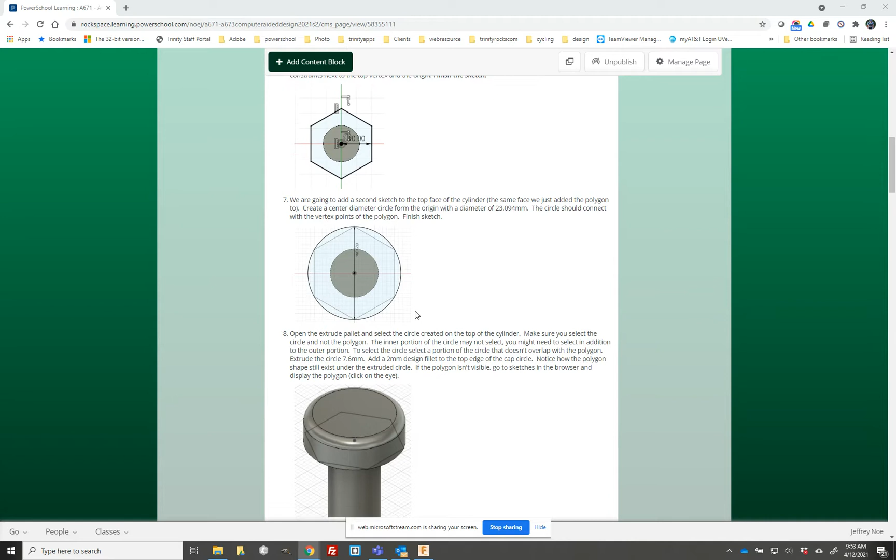So then we're going to come back, we're going to create a circle on top, sketch out a circle on top of the cylinder again, and we'll extrude it up so that we end up with both the polygon shape extruded and the circular shape extruded. The circle shape has the fillet on the edge, okay, to create that rounded corner. And we're going to come back to finish the cap. We'll have two bodies. The first body is going to be the rounded cap and shaft. The second body will be the polygon extruded.

We're going to split the rounded cap from the shaft, okay? And then we'll come back, we'll have two bodies. When we split the shaft and the rounded top, that'll give us a total of three bodies in our design. We're going to come back and combine the two bodies that make up the cap, those two bodies being the circle with the fillet edge and the polygon shape extruded. And we're going to use the intersect function. So only the material that is in both objects will be retained. Anything that is only part of one body or the other will be eliminated.

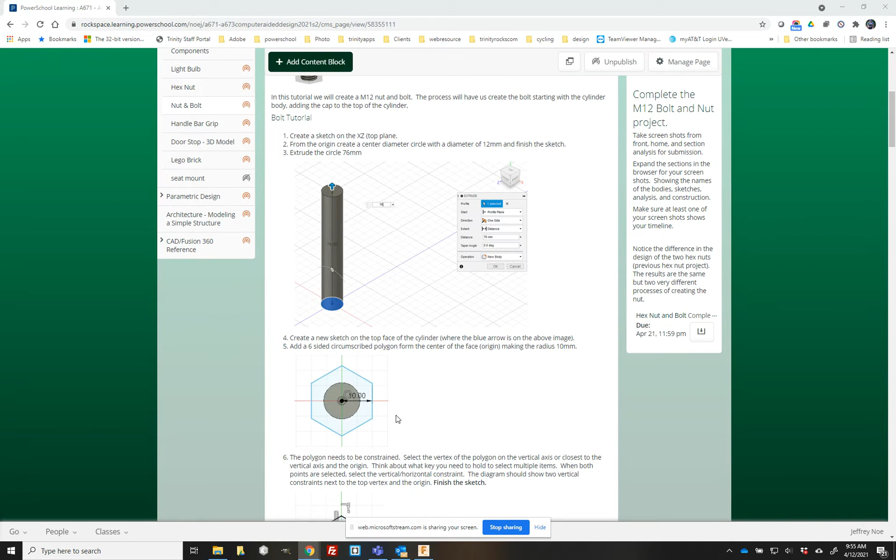Okay, and that will end up giving us our nice bolt cap with the chamfered edges like we had on our nut project. Last step is we'll come in and add the threads. Now, some of you will realize, why don't we make the circular top and the polygon portion of the top separate bodies when we create them? Well, if we did that, then we wouldn't get to go through the process of splitting, which is part of this project. We want to learn how to split bodies. If you don't have the split body function in your timeline, when I go to grade your project, there will be points deducted. So follow the instructions.

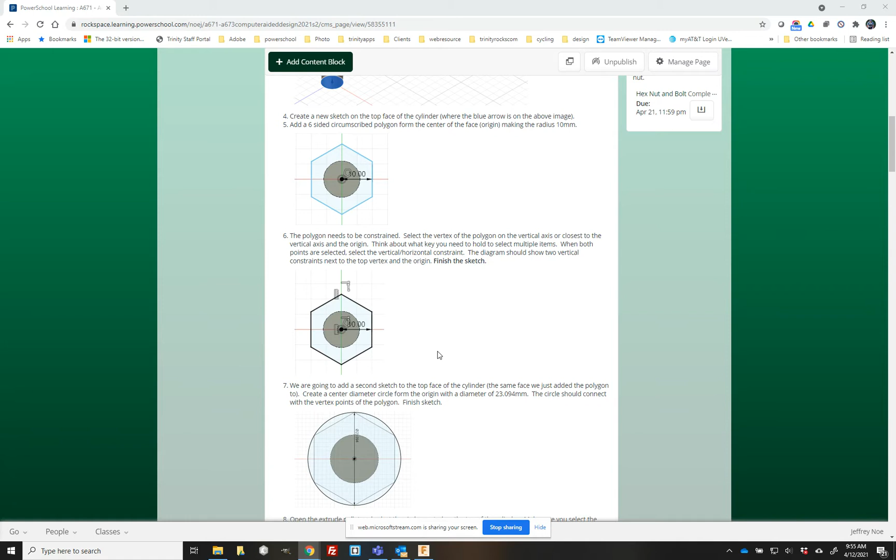All right, let's get started. I'm going to move this back to the other screen. And there's my example of the bolt that I've already done. I'm going to open a fresh canvas. All right, and we are going to sketch out the basis for the cylinder, which is going to be a 12 millimeter circle on the top bottom plane, and then we'll extrude it 76 millimeters.

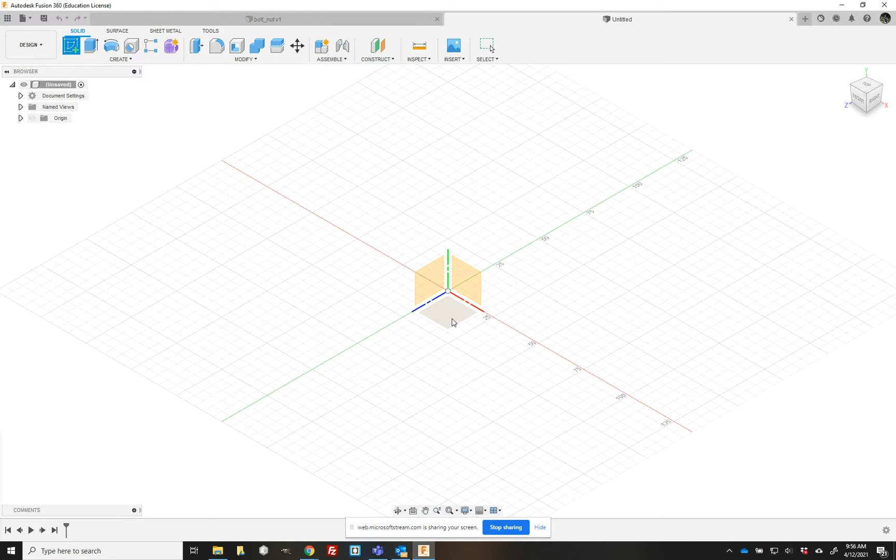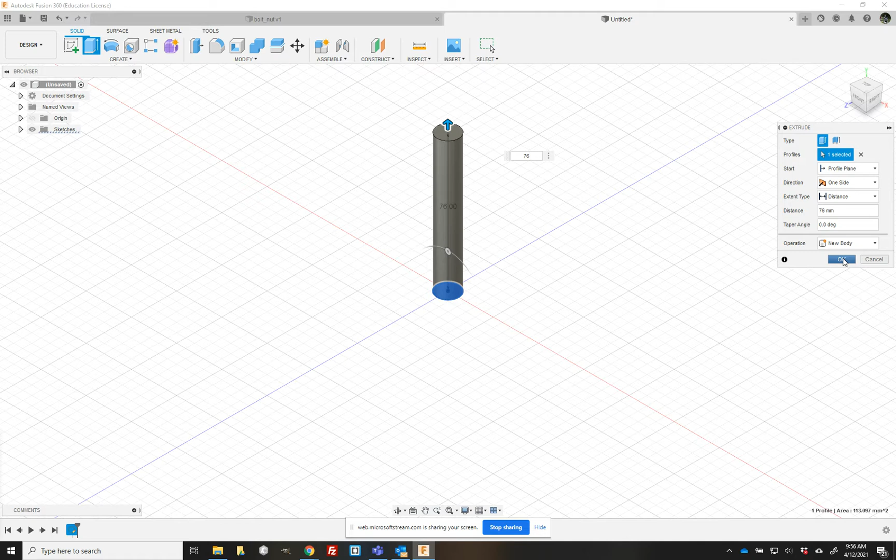So let's go create sketch. Top bottom plane, center diameter circle. Come to the origin, 12 millimeters, center, hit the E key, finish our sketch and extrude. And let's extrude it 76 millimeters. And there's our cylinder that will make up the profile of our bolt. I'm sorry. Click OK. There we are.

Now we're going to put the polygon on the top face of the cylinder. We're going to sketch out our polygon. It's going to be a circumscribed polygon, and the radius will be 10 millimeters. Then we are going to take that polygon. I'm going to draw it out on the x-axis, but we are going to add a constraint to it to ensure that it is horizontal vertical.

So turn off the dinging on my phone. It's Monday night, so the Monday night bicycle ride group is texting me that they're in.

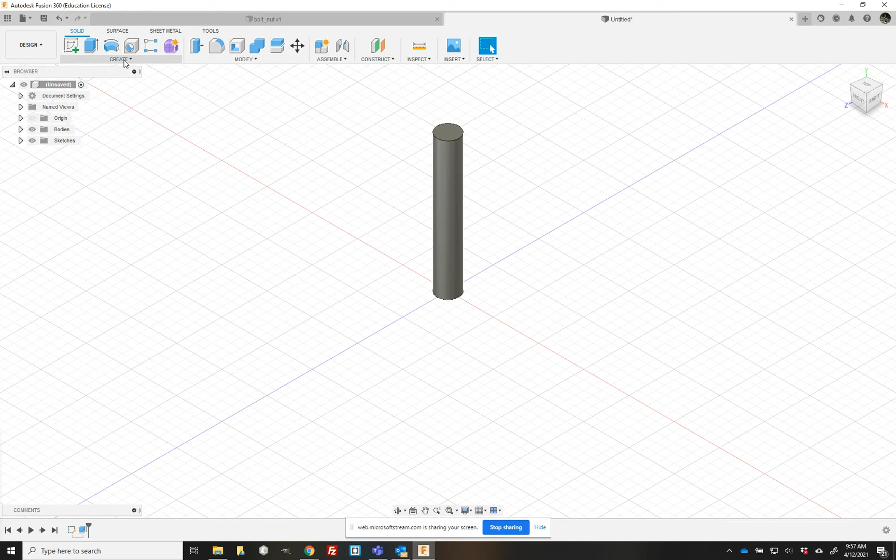All right, so create sketch. Why I went to the menu, I'm not sure. I never do that. Top face of the cylinder. There we go. Let's create a polygon, circumscribed. Start it from the origin, drag it out, as I said, along the x-axis, 10 millimeters. Type it in, click.

Now, we want to constrain this so it's horizontal vertical. So I'm going to click on this vertex. I'm going to hold the Shift key down, click on the origin. All right, they're both selected blue. I'm going to come up here, horizontal vertical constraint, click. All right, so I've got my constraints in place and added those.

All right, we have our constraints in place. We're going to finish sketch. So I've got this on top. Now I'm going to sketch out my circle on the top face of the cylinder. So let's go create sketch. Select the top face.

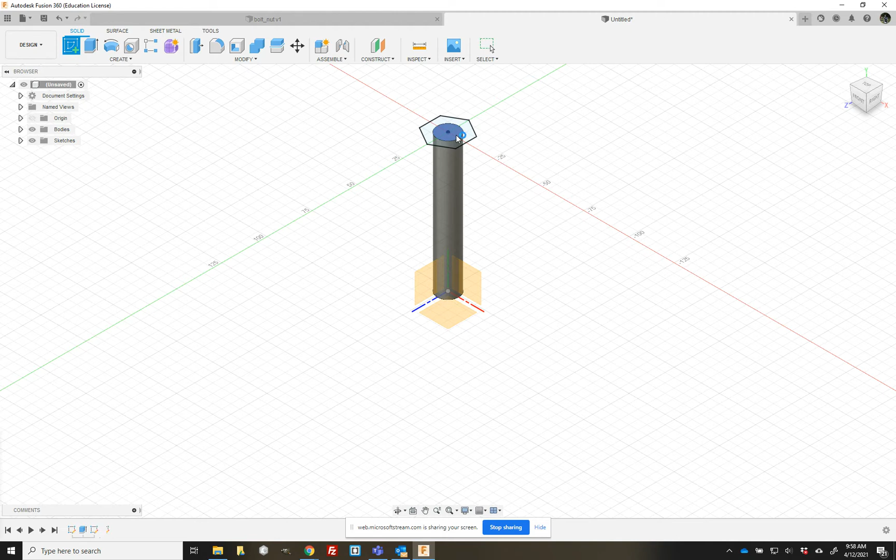And my circle is going to be 23.094 millimeters, which should snap it to the vertexes. Vortex, vertex. It's vertex. Okay. Snap it to the vertex here.

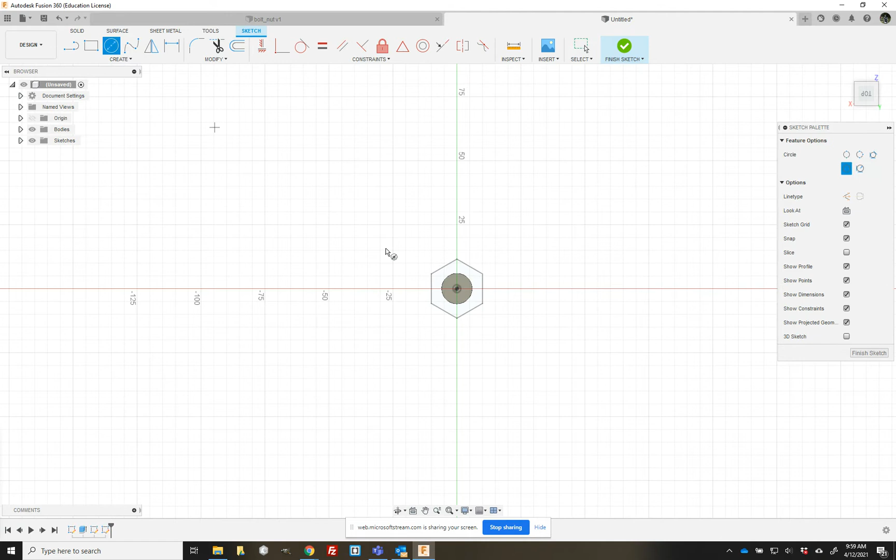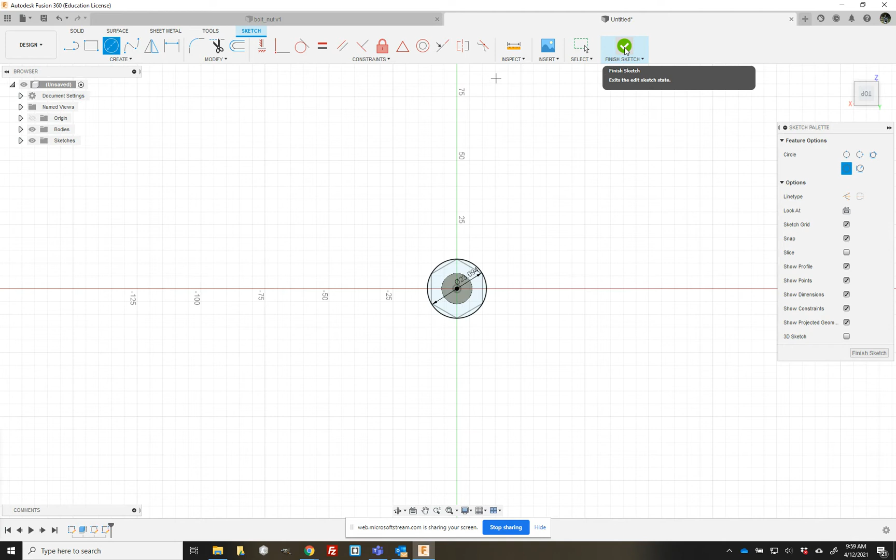So create center diameter circle. Drag it out. 23.094. Yes, that is the correct number. Enter. There's my circle. It does connect on the vertexes. Yes. And we will finish sketch, or hit E to finish the sketch and extrude.

So there we are. Now, we want to select the circle. If I select here, I'm going to select the polygon. There's going to be the small face. So I'm going to select the circle there. It looks like the top of the cylinder is selected. Let's go 7.6 millimeters. Yes, it did get the top.

Sometimes it leaves a hole in there. I've seen it do that before. And everything looks good. Join, click OK.

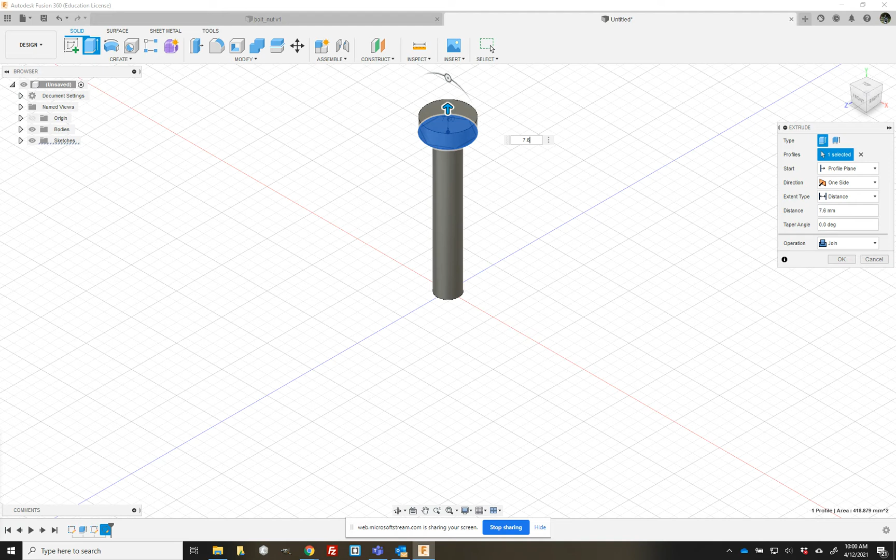All right, now we're going to fillet the edge of this circle by 2 millimeters. So I'm going to select the top edge. Oops, let me start that over. I'm going to select the fillet tool, modify fillet, or right here, fillet. I'm going to select the top edge, 2 millimeters,

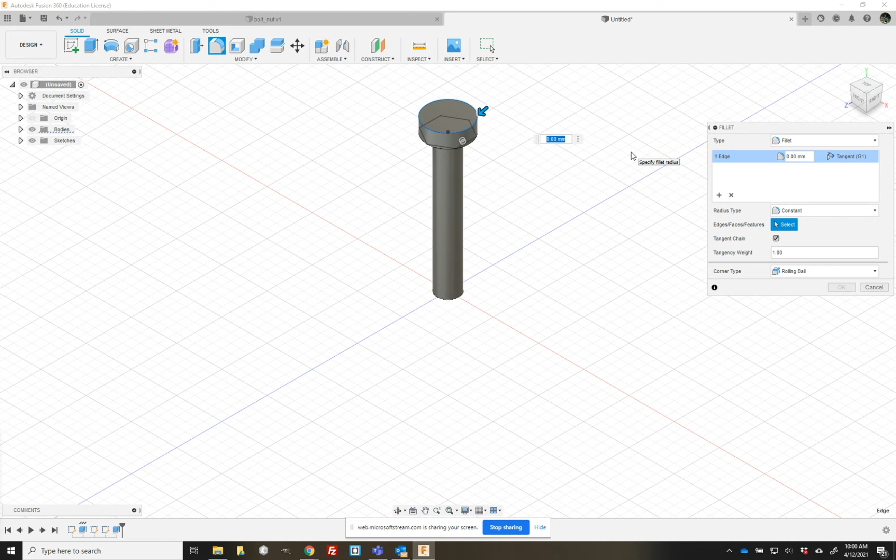and click OK. I don't have you all in class reminding me that I'm going too quick and not explaining where I'm clicking. Caught myself. All right, so we've got the cap there with a filleted edge, makes it nice and smooth.

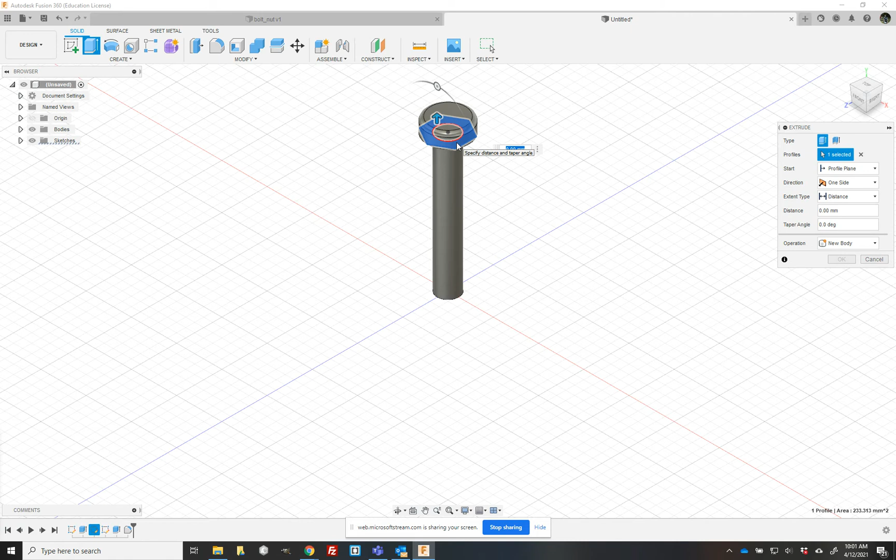So the next thing we're going to do is extrude the polygon up 7.6 millimeters. So extrude, there's my extrude icon. You can go create extrude, select my profile. So I'm going to select the polygon. Now in this particular case, notice that the middle is not selected. I want the middle selected.

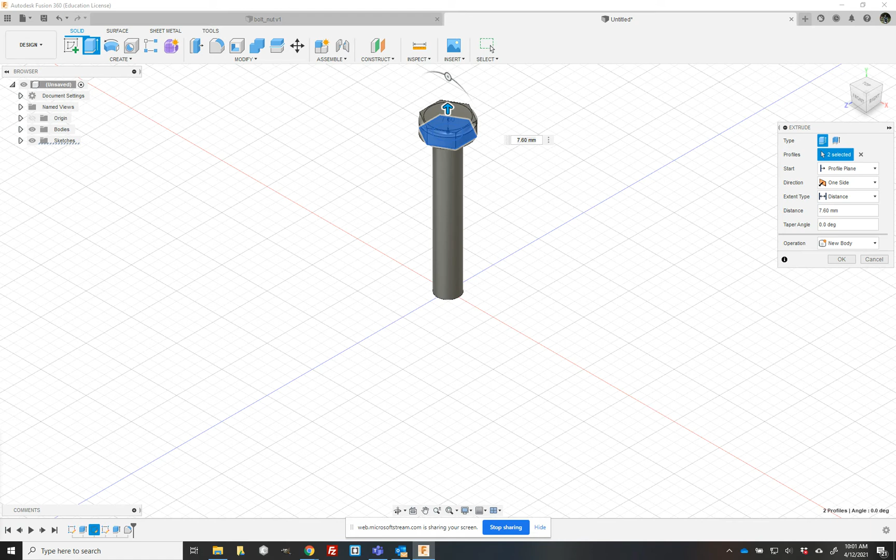Select. There we go. And it's going to be a new body. Okay. And 7.6 millimeters. I got that in. New body. Click OK. All right. Let's go expand bodies. I now have body 2.

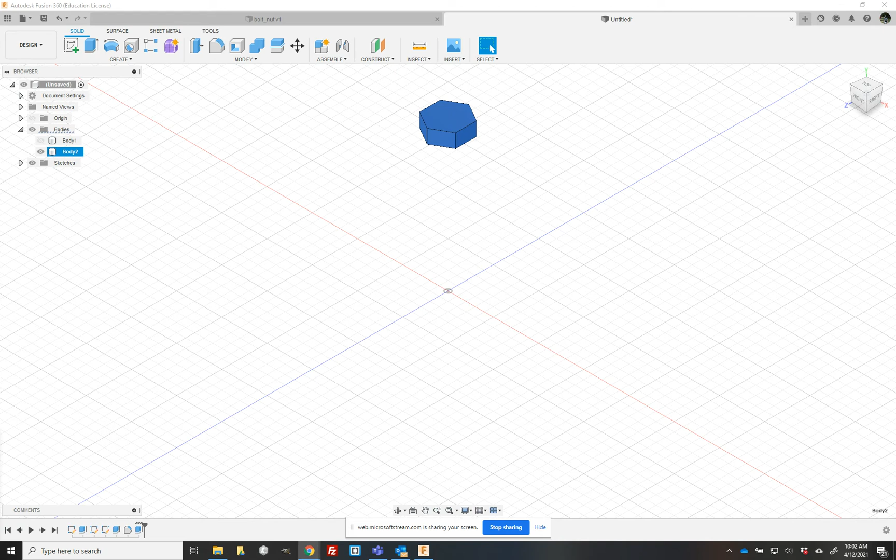Let's hide body 2, so I can just see body 1. Body 1 is the shaft and circular cap. I'm going to hide body 1 and I'm going to show body 2. But I hid that. Oh, well, I had body 1 selected. Body 2 is just the polygon shape of the cap. All right. So what are we doing here? Let's show them both again.

Now, the ultimate step is we're going to take the cap portion, hide body 2, select body 1. I need to split the cap portion of body 1 from the shaft and create a new body. We'll end up with 3 bodies, okay? The shaft will be body 3. This circular portion of the cap will be body 1. Body 2 will be the polygon shape. All right.

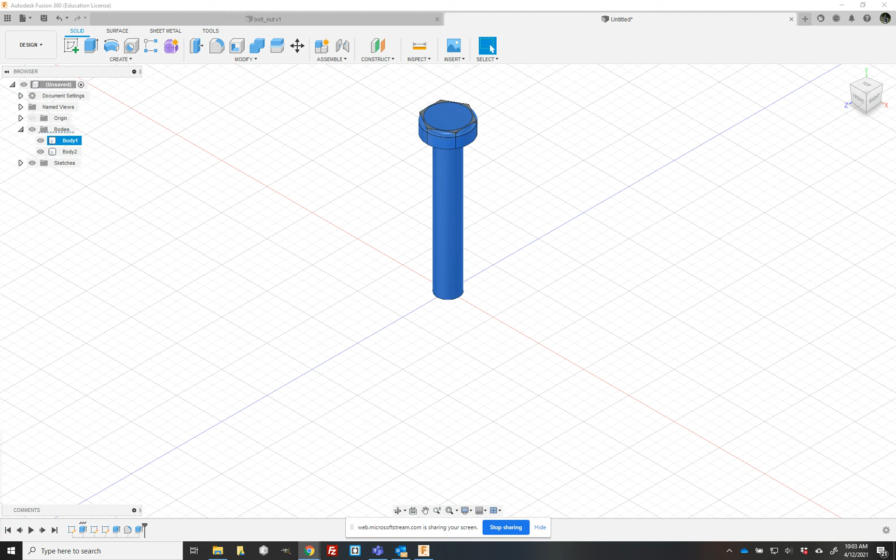Now, how do we do that? We're going to split bodies. What we're going to do is ultimately come back when we have the shaft separated away from body 1 as body 3. We're going to combine the circular cap and the polygon portion of the cap in an intersect function where only the materials that are in both bodies remain. Those that are only in one body or the other are eliminated. And that will give us our cap shape that we're looking for.

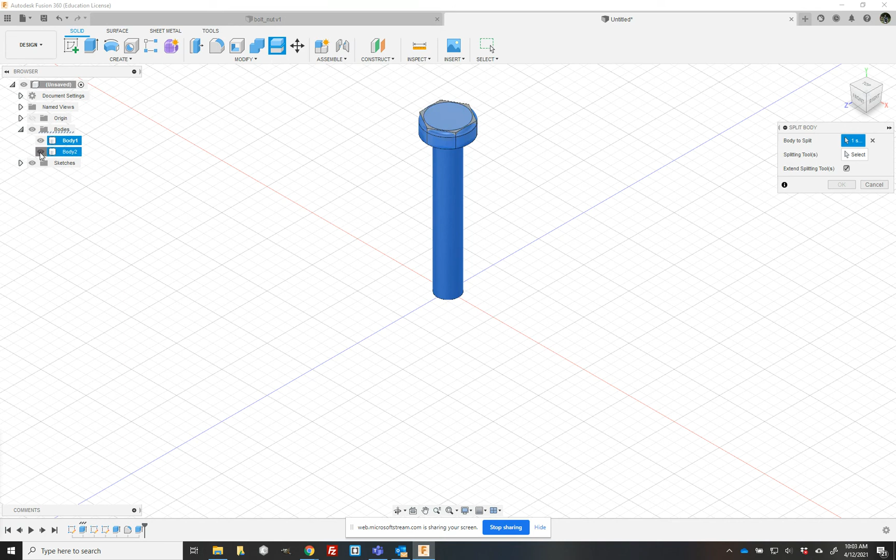So let's do the split first. Under the modify menu, we're going to split body. Okay. And we've got body 1 selected. Our splitting tool. I tell you what, I'm going to go ahead and make body 2 invisible. I'm going to rotate this over. Select our splitting tool, and it's going to be this bottom here. Notice how it creates the extension there. So I've got extend splitting tool selected, and you can see there's the split.

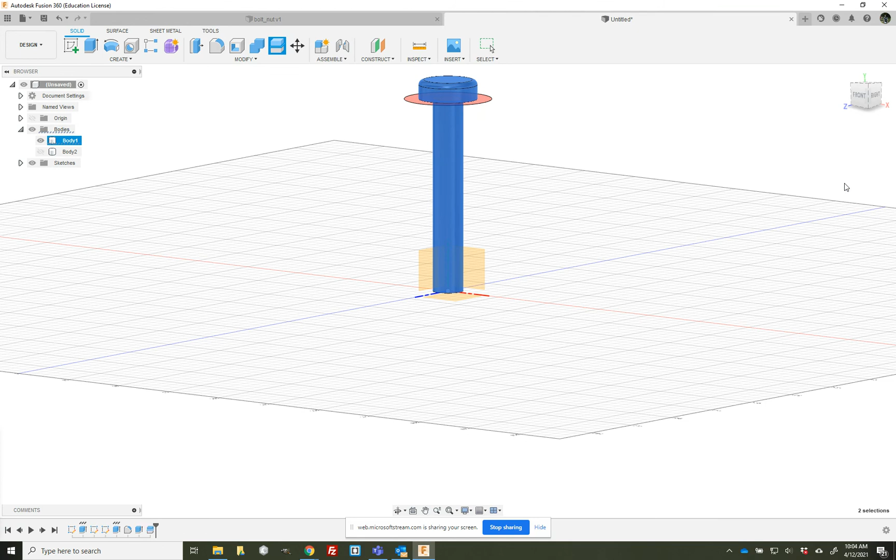Click OK. I now have body 1 and body 3. Body 3 is now the shaft. Okay, there's body 3. I'll hide body 3. Body 2 is the polygon shape. Top, and body 1 is the cap.

All right, I'm going to end up running out of time on this video. Better hustle. All right, so I've got body 1 and body 2 now visible.